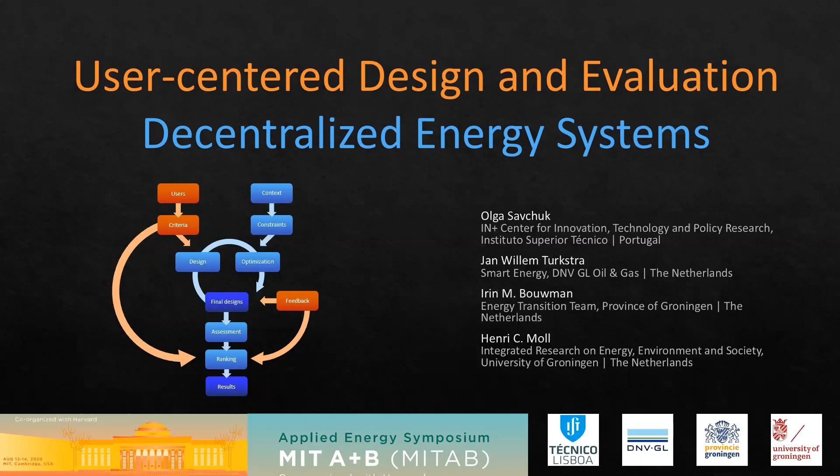Today we will explore the need for decentralized energy solutions, get to know the participatory approach to community energy design, and focus on application to a Dutch neighborhood.

Energy security, climate change, and resource scarcity motivate societies around the globe to install more renewable energy. However, as renewable energy production grows, the energy system experiences several grid challenges. This could be addressed in two different ways.

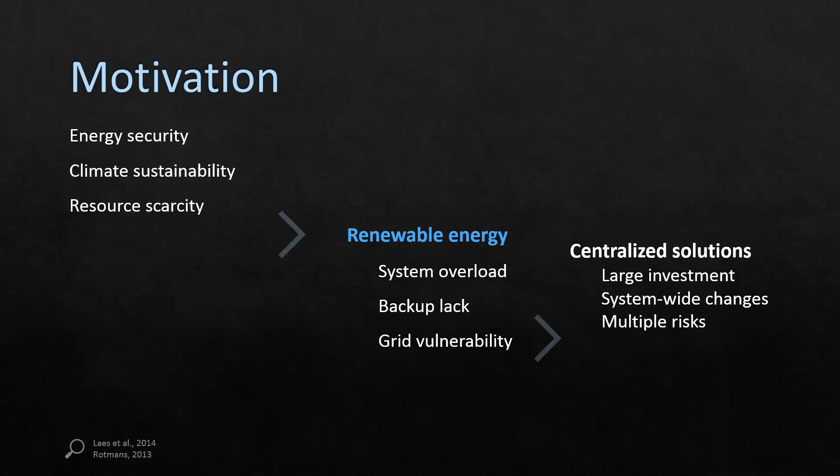Centralized solutions require system-wide changes, which result in large investments and long-term planning commitments. Such decisions can lock the country into a specific pathway.

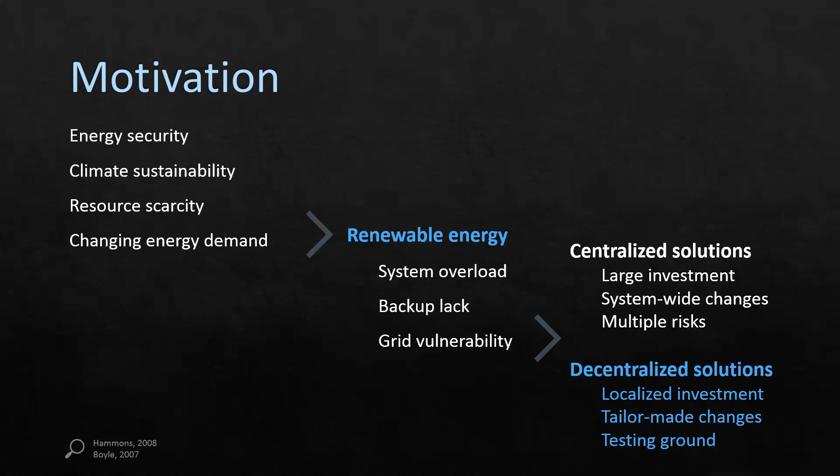In contrast, decentralized energy solutions can be better tuned to local needs and available resources. The risks are diluted, and the new energy systems can serve as testing grounds for technological alternatives. Additionally, such projects increase local energy awareness.

Technical robustness and social resistance are two major concerns when it comes to decentralized solutions. Lack of social acceptance has impeded numerous energy projects in the past.

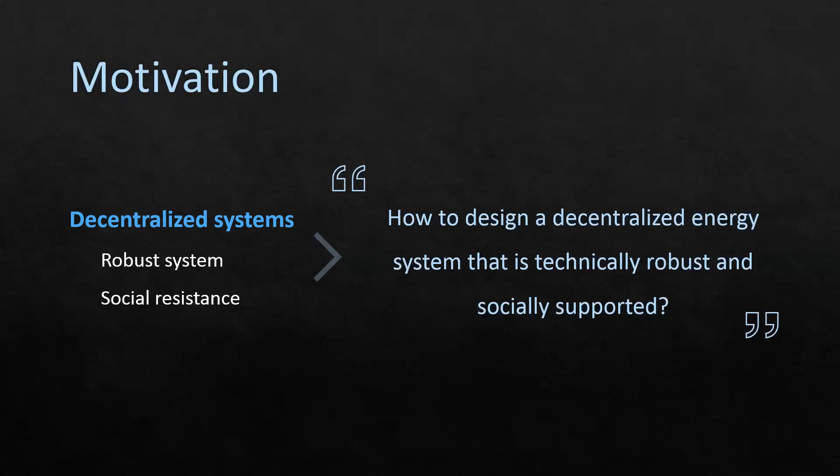To address these challenges, our study proposes a holistic approach to design, evaluate, and select a technically robust and socially sound decentralized system.

The Netherlands have a long-standing interest in sustainable energy transition, and particularly in decentralized solutions. As of 2019, there are 85,000 residents already participating in local energy communities. That is why we applied our approach to a Dutch neighborhood.

Participatory approach to community energy design, or PACE, is based on the participatory integrated assessment used in the water management field. We modified and adapted it specifically for energy applications.

PACE begins with a situation analysis. This includes extracting user preferences and technical constraints.

For user preferences, we conducted a survey among Dutch users to better understand their energy needs and priorities. We also verified the results against published studies.

We learned, for example, that nearly 40% of residents believe that locally produced and consumed energy is the most important aspect of the new system. We distilled the survey results into specific criteria that you can see on the right.

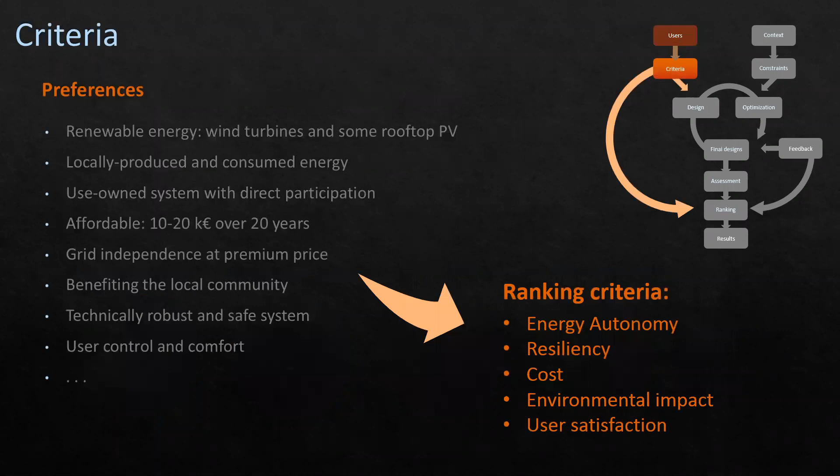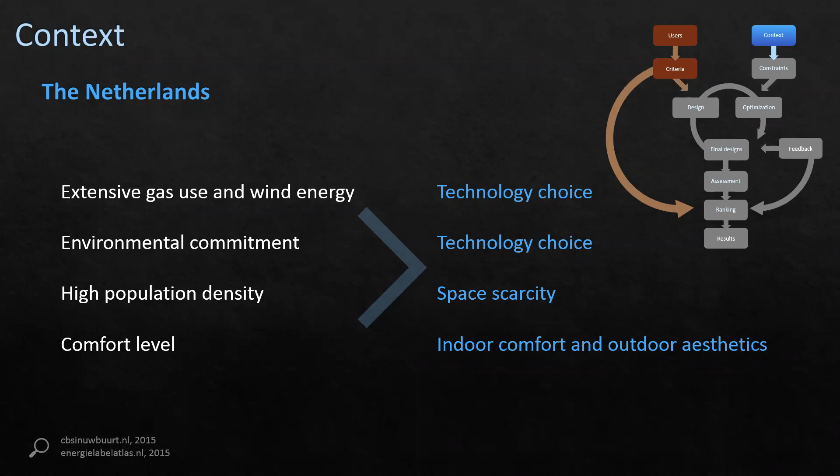For technical constraints, we analyzed the Dutch context. The country has a well-developed gas infrastructure and experience in wind energy. Also, Dutch society has a strong environmental commitment and expects a high comfort level.

Existing housing stock affects energy demand and the availability of space for new installations. Demographic features define demand profiles and potential flexibility. We identified a number of technical constraints based on the context analysis.

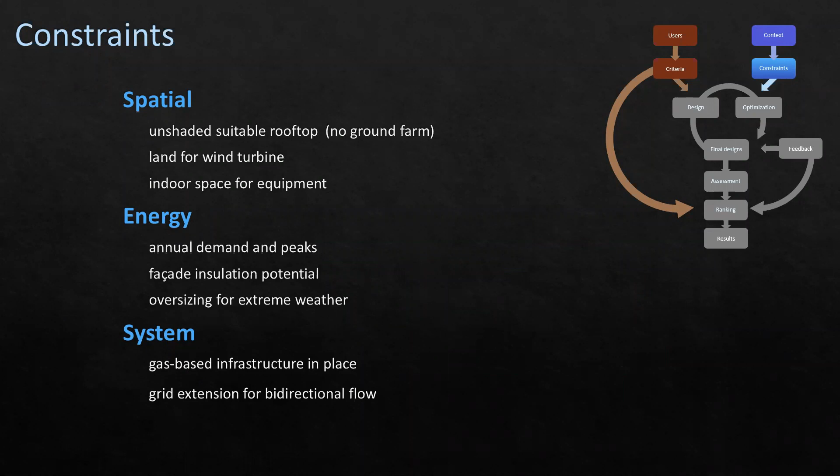For instance, the housing stock and shading define the rooftop area available for solar power. The second part of PACE is system design, which is an iterative process of design optimization and user feedback to obtain a set of final systems.

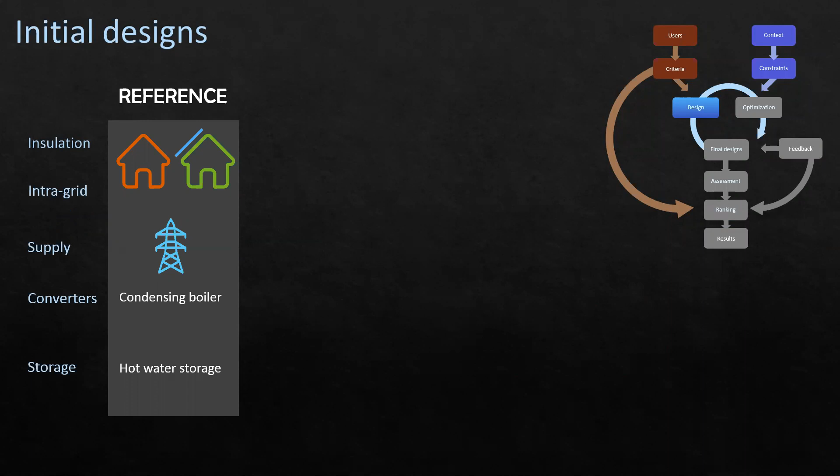To begin, we described a reference case where insulation varies across houses, there is some PV installed, and users are supplied by centralized grids. The DNV GL team designed 4 alternative systems, each emphasizing different user preferences from the survey.

Biogas power system prioritizes energy autonomy and low environmental impact. It includes better housing insulation, a shared biogas digester, individual energy converters, and intra-week gas and battery storage.

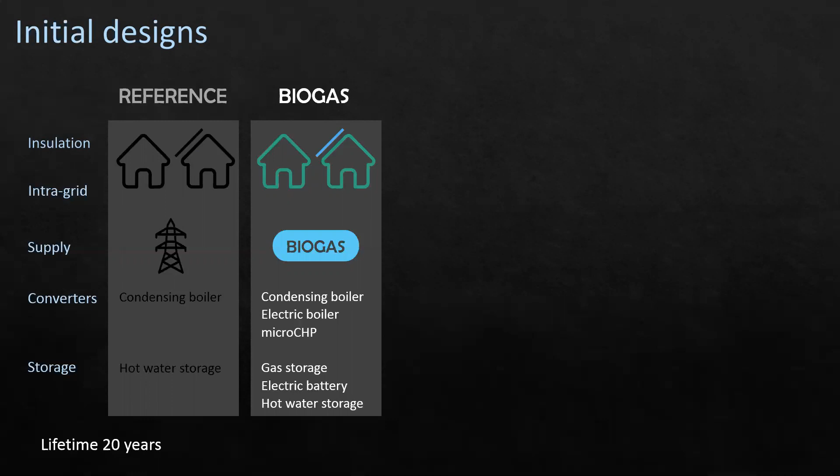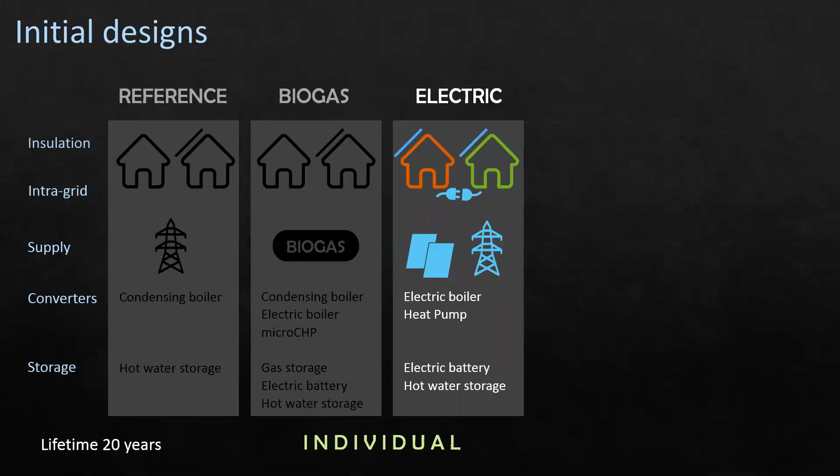All-electric system prioritizes high comfort and energy neutrality. It includes extra rooftop PV, interconnection among houses, individual converters, and intra-week batteries that are individually installed.

Smart grid system focuses on low costs and low environmental impact. It includes improved insulation, smart devices, interconnected houses, a large wind turbine, communal converters, and shared intra-week battery.

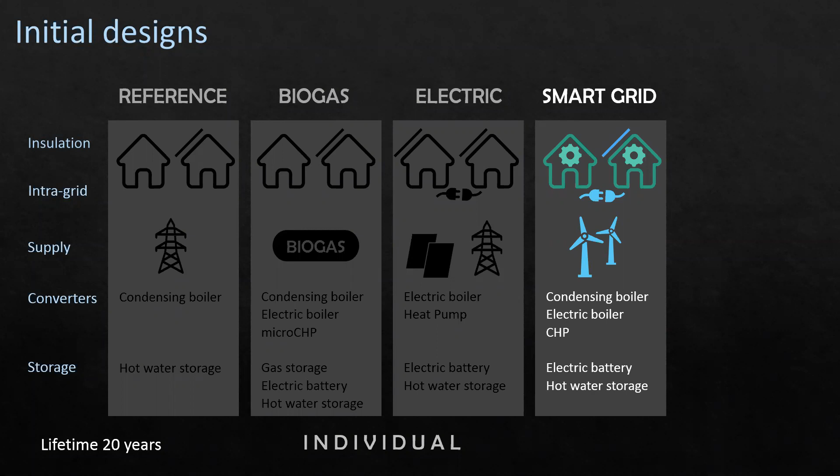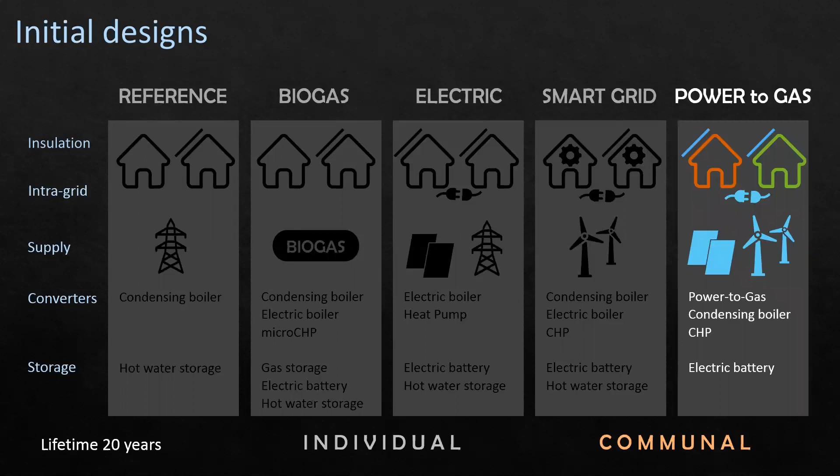Finally, power-to-gas system emphasizes high comfort and low environmental impact. The system includes extra rooftop PV, a large wind turbine, interconnected houses, communal converters, and shared intra-week battery.

For each system, we modeled energy flows over a year under typical and extreme weather conditions. For this, we applied established energy models developed by the DNV GL company. Here you can see an example of heat, electricity, and gas demands for a winter week in a representative detached house.

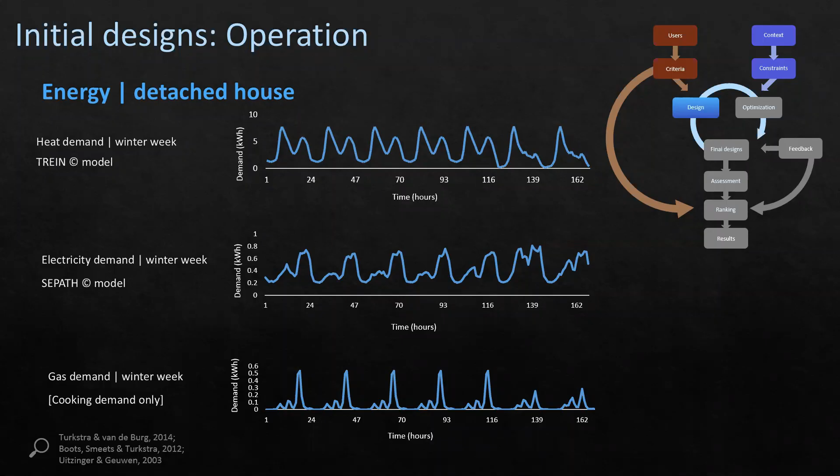Using these demand patterns, we optimized energy flows by pricing emissions and minimizing overall costs. Each system was initially sized at the maximum possible capacity of every device. They were required to always meet energy demand, even during extreme conditions.

The MOTER model then optimized the use of converters and storages. Based on optimized energy flows, we sized installed capacities by adding a safety margin of 20% to peak asset use.

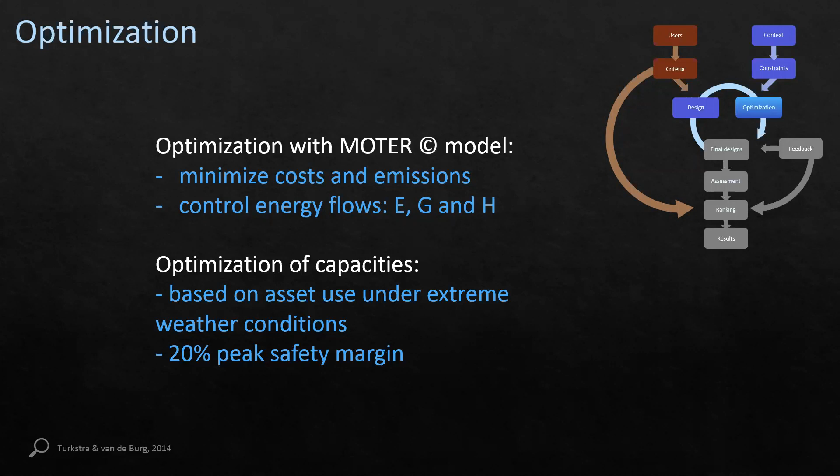The resulting designs and their costs are presented to the users for feedback. For example, they may set an upper limit to acceptable cost, which could eliminate some designs. In our pilot study, the financial support came from the industrial partners, hence all systems were considered.

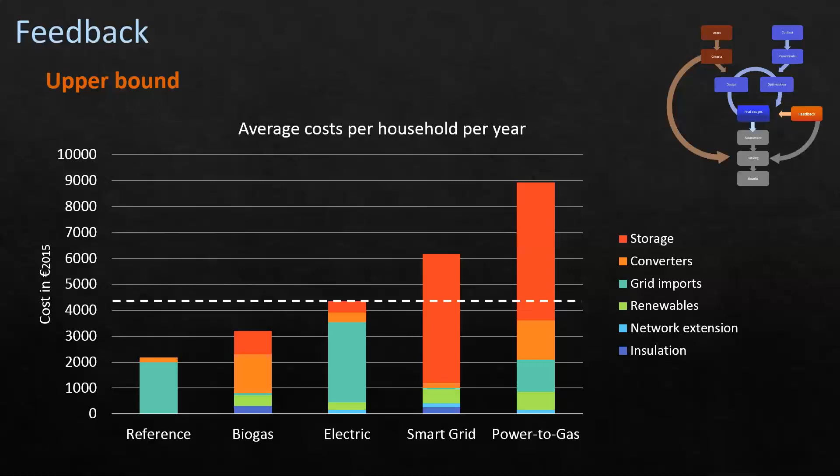At the last part of BASED, we assess, rank, and select the final systems according to the user preferences. In our case, energy autonomy, resiliency, cost, environmental impact, and user satisfaction.

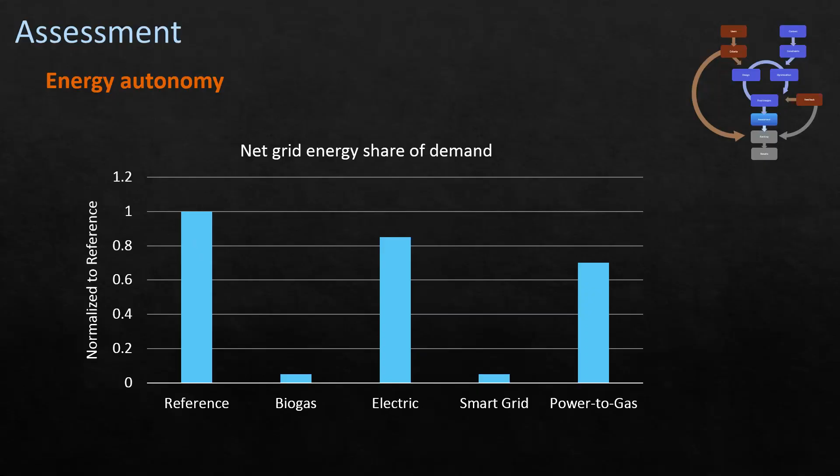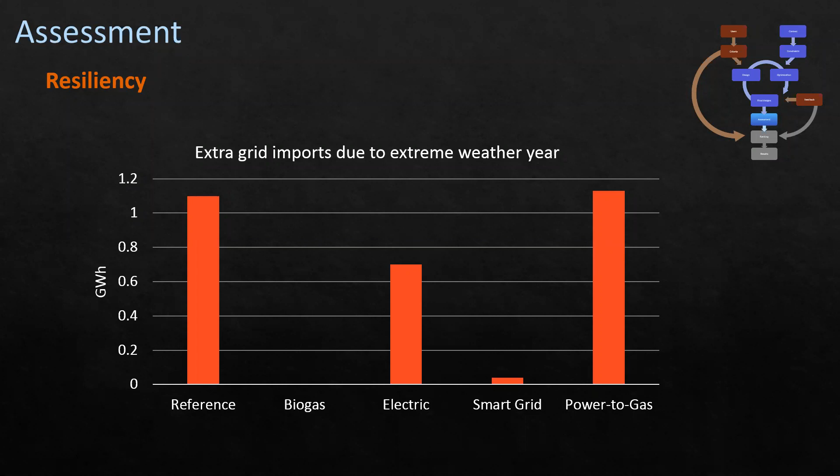To assess costs, we used 2015 prices. As expected, every new system will cost more than the reference case. We also see that the cost of smart grid and power-to-gas systems are dominated by electric battery.

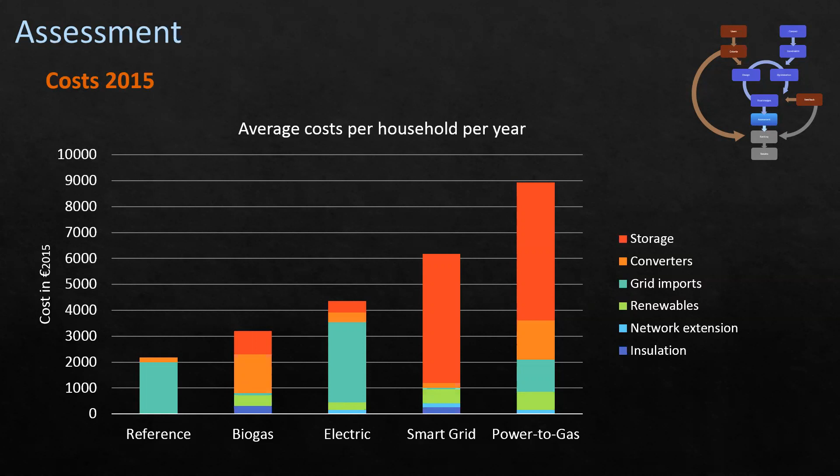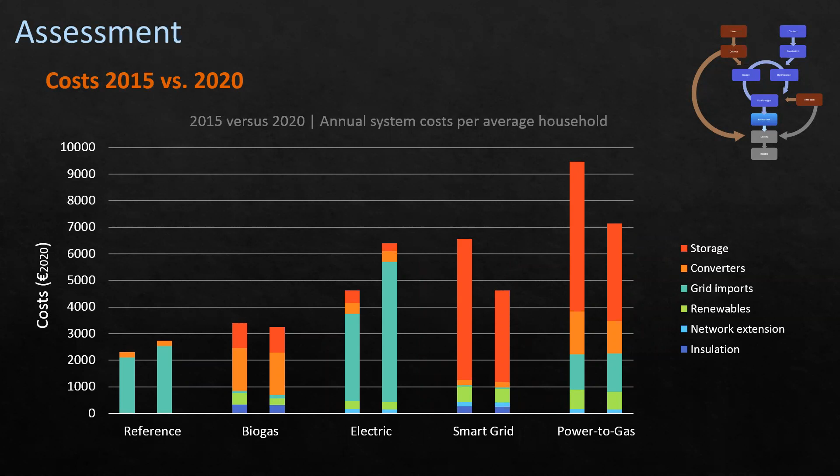To test the competitiveness over time, we performed the same calculations with updated prices for 2020. Here we observe the reduction of cost due to cheaper electric storage and an increase in cost due to more expensive electricity tariffs.

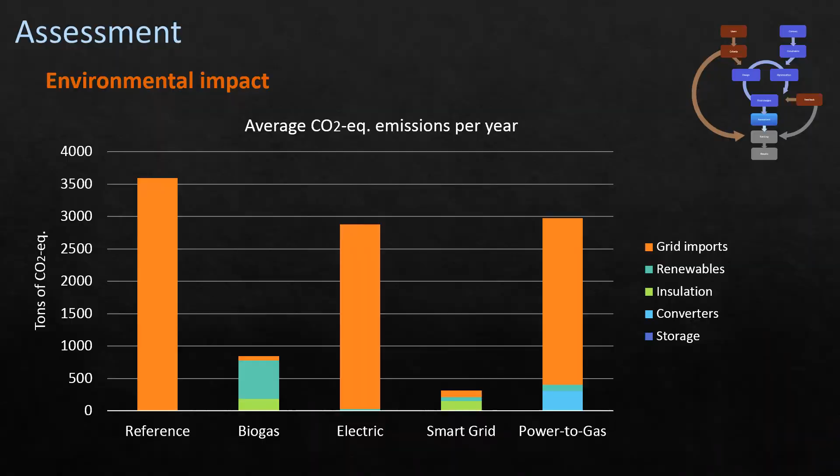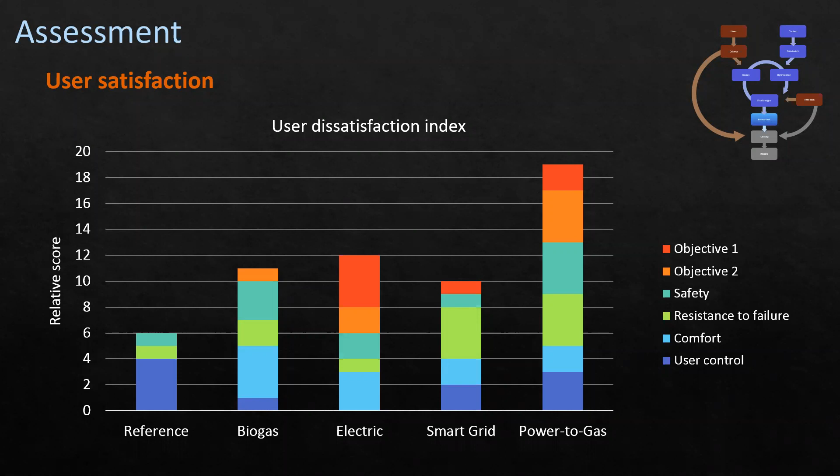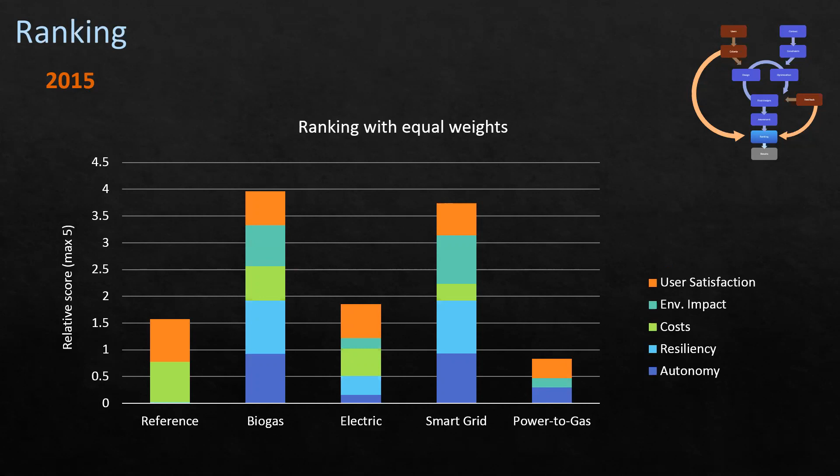Now we obtained the assessment of each individual criterion, we rank the systems and select the best one. With equal weights and 2015 prices, we see that the biogas and smart grid systems are the best choice for this neighborhood.

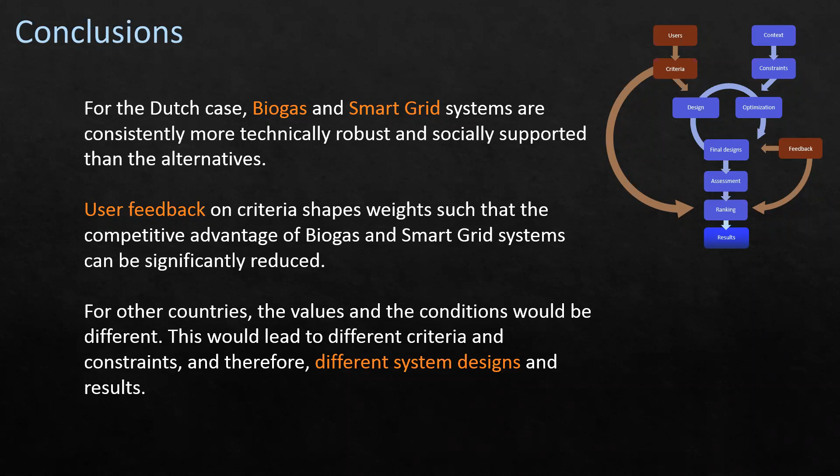Applying PACE to the Dutch neighborhood, we found that the biogas and smart grid systems are the most likely to meet user preferences. The choice between the two systems strongly depends on user feedback. The values and conditions dictate possible system designs and final ranking of the systems. That is why another country would have its own set of systems.

In summary, decentralized energy systems are relatively fast and low-risk solutions for local energy transitions. They also allow to explore a variety of technologies. With PACE, we can navigate the solutions that will be socially acceptable and fulfill the technical needs.

The energy transition is not a fixed predestined pathway, as local conditions and values are diverse. The Dutch case study shows the practical feasibility of PACE to find the optimal transition pathway that matches the local context, so that many nice transitions may flourish.